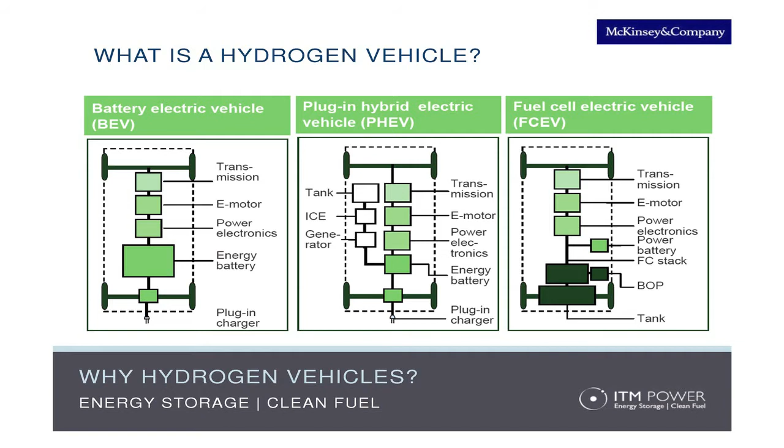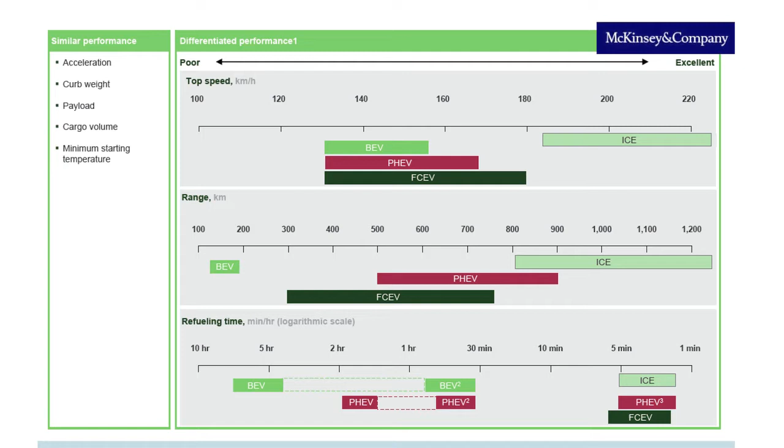What you can see here is a comparison of speed, range, and charging or refueling time. You can see that all of those vehicles have a comparable speed, not dissimilar from an internal combustion engine. In terms of range, the battery electric vehicle has a lower range, but the fuel cell vehicle is comparable to an internal combustion engine. In fact, most fuel cell vehicles could do 400 miles on a single charge of hydrogen, which you can get in 3 minutes - a very similar experience to refueling with petrol.

It takes longer to recharge an electric vehicle, a number of hours, maybe 5 to 6 hours. You can use rapid recharging - you end up with a more expensive infrastructure, but you can get that down to around 30 minutes.

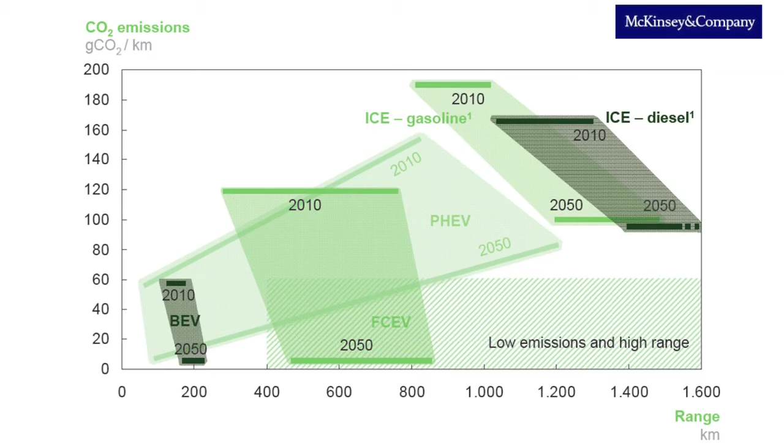People always worry about efficiency. Efficiency is a bit of a misnomer - it actually depends on when you're exporting the energy from a particular energy grid. But here is the well-to-wheel efficiency of all of those vehicles. What I've done is gone tank to wheel and infrastructure to tank, because what happens is people look at the vehicle itself and say it's more efficient to charge a battery. Actually, if you look at the whole well-to-wheel analysis, there's a higher efficiency for a fuel cell vehicle.

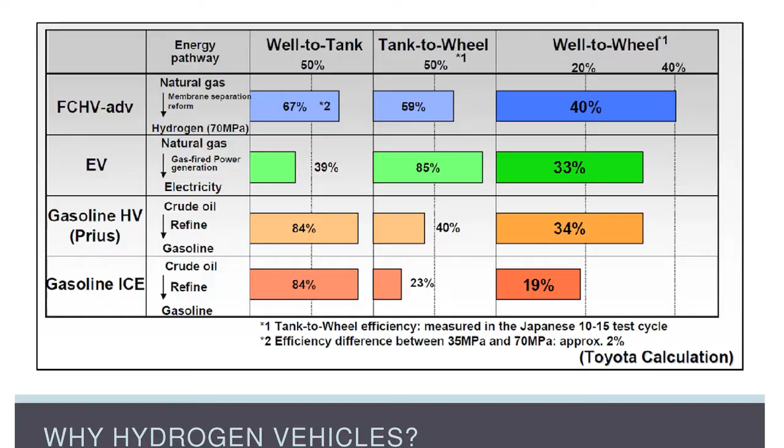How will these vehicles play together? Well, actually, we'll have a portfolio of vehicles in the future, I'm sure. We'll have small, low-range vehicles that will be plug-in electric vehicles for cities, and for very large, long-range vehicles, fuel cell vehicles. So this analysis comes from Toyota.

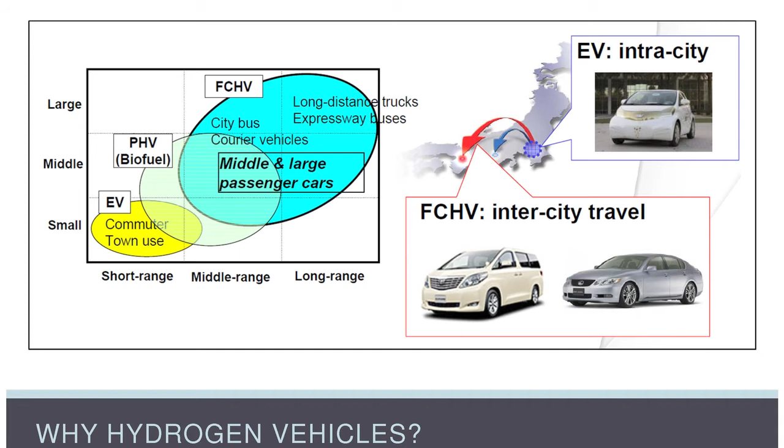So let me talk about hydrogen as a perfect fuel - hydrogen that's made from renewable power that can be made on site. So what's the challenge here? Well, actually, we're building up an infrastructure of renewable power, and it needs energy storage. And actually, energy storage is a pretty elusive thing and has been for a long time in the power industry. It's very difficult to store power for long periods of time, but it's very easy to store hydrogen.

You can make hydrogen with a 70% energy efficiency directly from renewable power and store it for as long as you want. And that's why I talk about a perfect fuel, because it has absolutely zero carbon footprint.

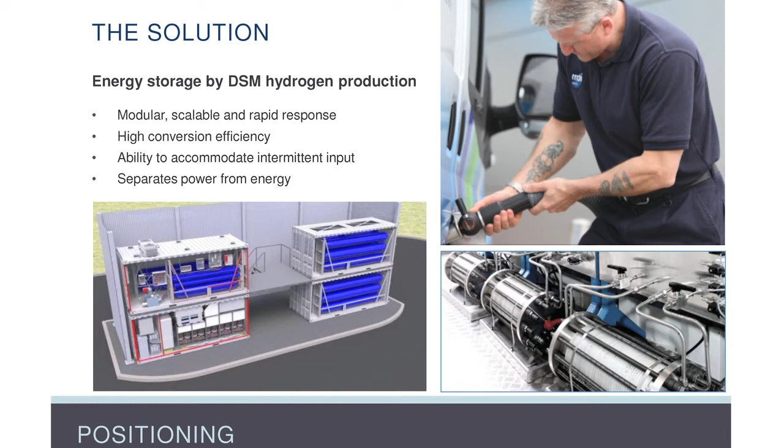The way you manage that then, this is equipment that we're putting down on Eco Island. That's a quarter of a megawatt of load that stores power for 2.5 days. It's completely modular, and you can build it in terms of the power rating or the energy rating. The point about hydrogen is that if you want to store the power for longer periods of time, you just make the tanks bigger.

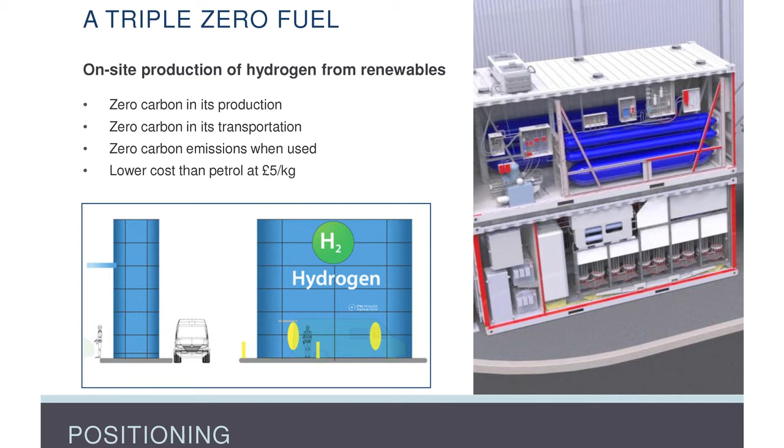With other technologies, you have to buy more and more of the expensive part. The unit would be demand-side managed by power companies, in our case Scottish and Southern Energy, and if it's used to balance against renewable power, it has a zero carbon footprint. Also, we make it on site, so there's no carbon footprint in its transportation. And of course, with a fuel cell vehicle, the only emissions are hot water. So we call it a zero-zero-zero fuel.

The other very important thing is that you can make hydrogen for less than £5 a kilogram. That's important because that means the fuel is lower cost than petrol or diesel. And it's made on site, and it's zero carbon footprint.

Okay, so let's talk about the rollout of hydrogen infrastructure across Europe particularly, and also the vehicles. There were accords signed in Germany and Japan to roll out hydrogen vehicles with a target date of 2015. And actually that's a commitment from all of the OEMs to be rolling out tens of thousands of production vehicles each in 2015.

Actually, Mercedes-Daimler are going a year early in 2014, and Hyundai, who are here today, are going early in 2013, which is next year. And in fact, now you can buy a Hyundai vehicle. There's a vehicle outside that you can even test drive.

What do you have to do if you want to roll out hydrogen vehicles? Well, actually, what you have to do is coordinate the rollout of the vehicles and the infrastructure. And around the world, we call these hydrogen mobility programs. The first one was in Germany in 2009.

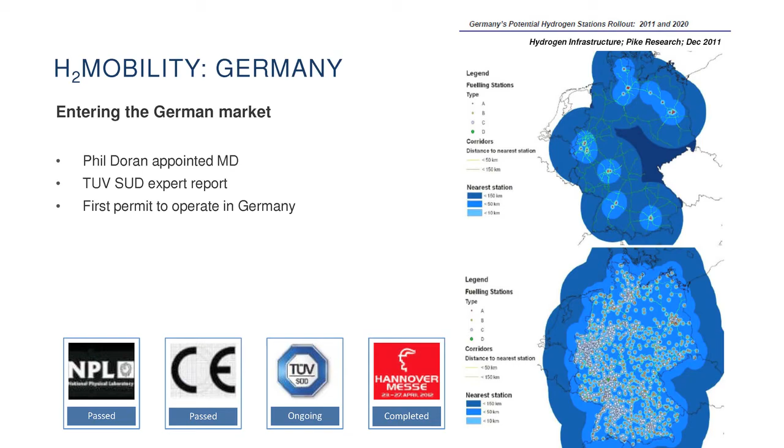So the German program is very significant. Here's a map of the rollout. There are many existing hydrogen refueling stations in Germany, another 50 announced just a couple of weeks ago, and more coming all of the time.

We were delighted to be the refueling partner at Hanover. Actually, we got our first permit to operate in Germany, got our expert report from TÜV Süd, passed all of the qualifications, and made hydrogen on site at Hanover and refueled the fuel cell vehicles.

UK H2 Mobility was actually started at the end of 2011. The announcement was January 2012. Here are the partners - a very significant breakthrough in the UK. We got an MOU signed by DECC, BIS and the Department of Transport. So three government departments.

With a consortium with these industrial companies, the infrastructure then is BOC Linde, Air Products, Air Liquide, and ITM Power, and there are many car companies involved, and one utility, Scottish and Southern Energy. So I think a great breakthrough for hydrogen mobility in the UK.

Okay, so let me tell you about 2 more developments in the UK, 2 projects that we've been involved in: Marks and Spencer's and also Eco Island. So we're interested in individual vehicle refueling, and we have a significant project with Boeing in the area of aircraft. Depot refueling, we work with Marks and Spencer's on refueling forklift trucks for warehouses.

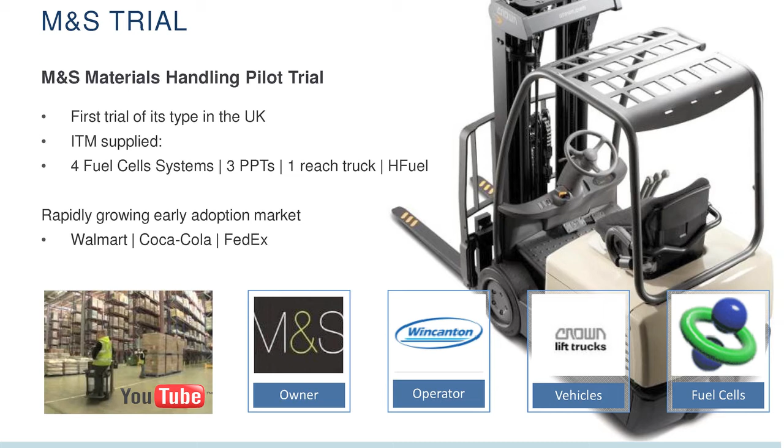And the win here is performance. Actually, you can refuel a forklift truck in 90 seconds rather than recharging it in 6 hours. And it will do an 18-hour shift. If you're interested in this, there is a video on our YouTube channel.

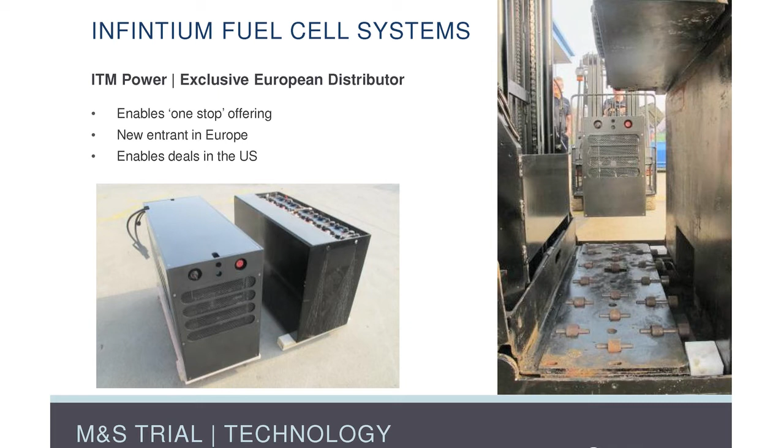When I say a direct replacement, it really is a direct replacement. Here's the fuel cell that we are the distributor for. This is made in Texas. It is a direct replacement for the battery. You see the fuel cell on the left and the battery on the right. You slot it into the forklift truck, and you can refuel it in 90 seconds. It takes about an hour to do that changeover.

Okay, Eco Island. Eco Island is the Isle of Wight, and the Isle of Wight is planting up with renewable power. Its aim is to be completely self-sufficient in energy, not just electricity, but energy, and be a net exporter to the mainland. To do that, you need energy storage, and you need a smart grid.

And we're doing the hydrogen energy storage and hydrogen vehicle refueling system. We work with SSE, who are planting up the renewables, Toshiba, who do the smart grid controls, IBM, who are doing our user interface, Cable and Wireless are doing the data communications between us and the refueler, and between the refueler and the vehicles. And we work with Toyota and Hyundai on the vehicles. There'll be fuel cell vehicles, hydrogen internal combustion vehicles, and also marine vehicles.

So let me just finish with some market dynamics, a very simple market dynamics of what the drivers are for the adoption of hydrogen worldwide. So 3 things that are very important. First is that fossil fuels get more and more difficult. There's a fantastic article, The End of the Oil Age, in The Economist, and another one in National Geographic called The End of Cheap Oil. I mean, actually, oil just gets more and more difficult.

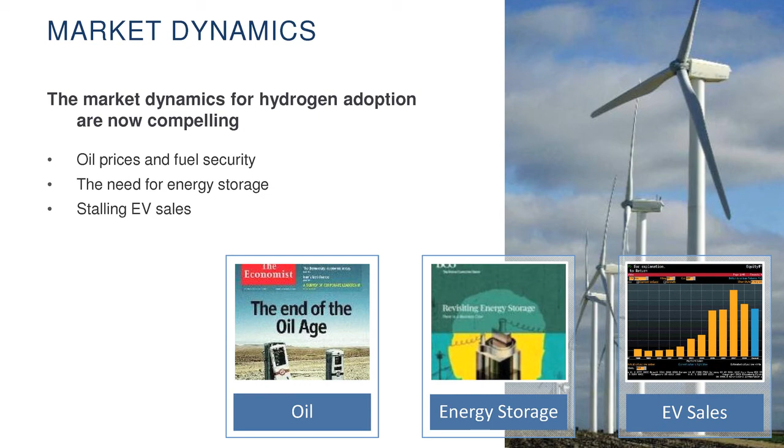At the same time, the world's planting up with renewable power that needs energy storage. And actually, you can store the energy as hydrogen and replace the oil that isn't there anymore with that hydrogen made from renewables. And the third dynamic is the sale of electric vehicles, which peaked a couple of years ago and is now declining because of some of the issues to do with recharging time and range. Actually, they're the 2 problems that are solved with a hydrogen electric vehicle. You get the fuel in 3 minutes, and you can travel 400 miles.

So here's just a small observation at the end. The world has a serious problem. It has to decarbonise energy, and energy is the largest market in the world. Actually, that problem, viewed dialectically, is a huge opportunity for the UK. There's more capital equipment being bought in this market now than there has ever been before. It's the largest capital spend in history. And we should be manufacturing and selling the equipment in the UK that's being bought worldwide.

What you can see outside today is the Hyundai fuel cell vehicle and a mobile refueling unit. Both of those are real offerings. They're actually for sale. And I'd recommend to you that you get in the Hyundai vehicle and drive it. It's a fantastic vehicle. And if you drive it, if somebody says to you tomorrow, hydrogen vehicles are years away, you can say, no, they're not. I drove one yesterday. Thanks very much.